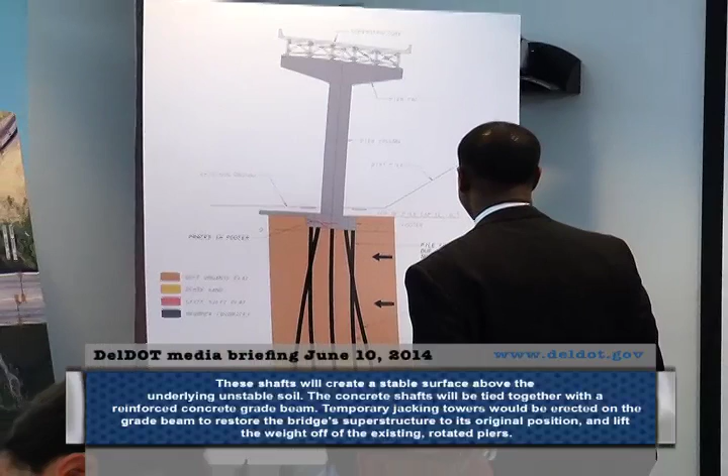When you close an interstate, it's a big deal. From our analysis of our engineers' reports, we decided we could do it safely without causing traffic chaos. So we got the crash trucks and the cones, and within a few hours we were able to close the bridge, and we did it safely, which we were grateful to accomplish.

As soon as that bridge was closed, our thoughts immediately turned to how do we get this bridge back open? So we were very focused on getting the right team of experts in the room from across the country who could tell us what was going on and how we were going to get open again.

On Tuesday, Harry was at the bridge on Monday night from Aecom, and on Tuesday I walked into a room with folks from Aecom, who's here today representing that firm. Aecom is a multinational firm with thousands of employees, so there are a lot of folks at Aecom not here today because they're busy working on the solution.

We had folks from the Federal Highway Administration, not just our local folks, but also a geotechnical expert who had worked on a similar issue in Wisconsin a few weeks ago, because we knew there was a subsoil issue that had to be addressed.

We had civil engineers from the University of Delaware. We had actually asked a gentleman considered to be an expert on this matter in terms of bridges to come down. So we literally had all of the experts together in the room to determine how we're going to get this back open.

At the end of the day, my chief engineer called me and said, we don't want to get too far down this road with the design and then have the contractor come in a couple of weeks and say, you've designed something that I can't build.

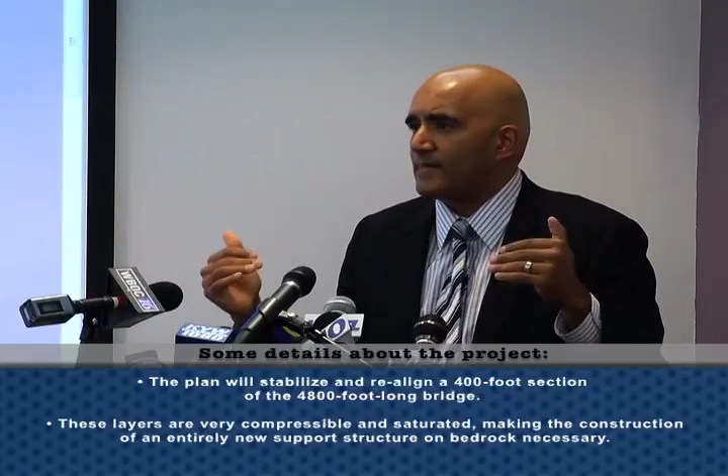The other option, and this is still something on the table, there is a small chance that we will have to completely tear down this 400-foot section of the bridge and rebuild a new section. If that is the case, we will be looking at later this year or early next year before you would see traffic there. That is something we are trying to avoid, and that's why they're trying to engineer literally on the fly, bringing the builder in at the same time so we can avoid that.

So what we've come up with is sort of a hybrid solution of putting the bridge on a firm foundation and then jacking up the existing structure in order to open the southbound lanes first, because there is less damage on that side, and the northbound lanes potentially a month later.

We will know more about a specific date in a few weeks once this drilling has commenced and we understand what is going on up to 140 feet below the surface. But the bottom line is that right now we are looking at around a Labor Day target for opening the southbound lanes, with the northbound lanes to open two weeks to a month later.

As I said, in a couple of weeks we'll be able to firm that up. Could it get better? It could. But could it get worse? It could. So we don't want to set unreasonable expectations at this time.

With that, just as a brief update on activities around the site, a lot of people have commented on the fact that there have been 24/7 operations going on down there since we started, and I want to commend some of the Delaware contractors who have been helping us remove that dirt. 50,000 tons of dirt was removed as of yesterday, and that's where, again, we pointed out that the bridge has begun to rebound slightly, which gives us reassurance about getting that dirt out of there.

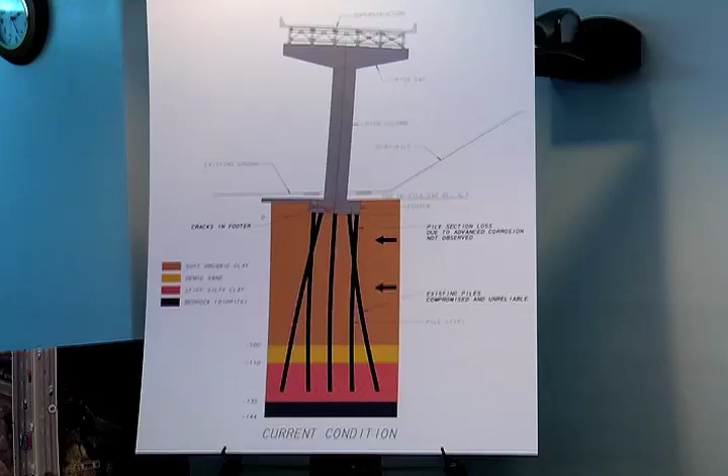From Pier 10 left or south, and from Pier 15 to the north or right here, Delaware has inspected the bridge, and we have no signs of distress in any of the other areas. So what we'll be talking about primarily is this zone from Pier 11 to 14, where we have evidence of distress.

This view is somewhat exaggerated, but it shows the conditions to allow everyone to understand what we're facing. The bridge has leaned. This is only one of two hammerheads, there's a paired structure here.

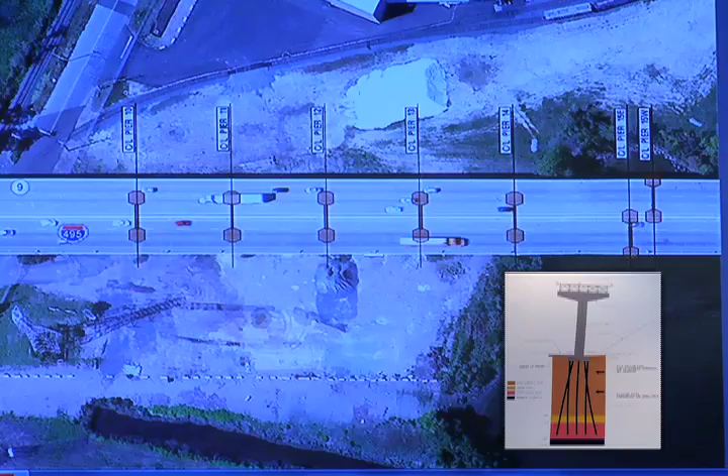What you're seeing is a lean-over produced, we believe, from a lateral force pushing against the original bridge foundation, which consists of steel piles tied together near the surface by a concrete foundation or footer. As you can see, with the leaning of the pier, there is a distortion in these piles. The piles go through soil at the top that is largely fill.

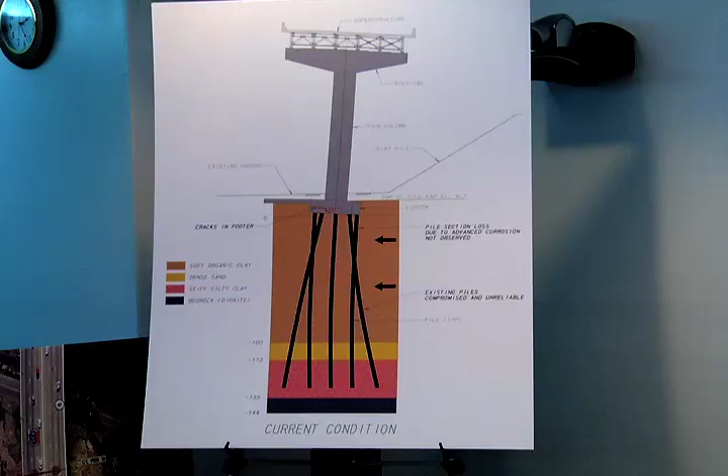Largely fill of a mixed composition. Then we have a layer of extremely poor organic clay that is probably just compacted, long-accumulated mud from when the river used to run here. And then down into stiffer material, sand and a stiff clay, and bedrock.

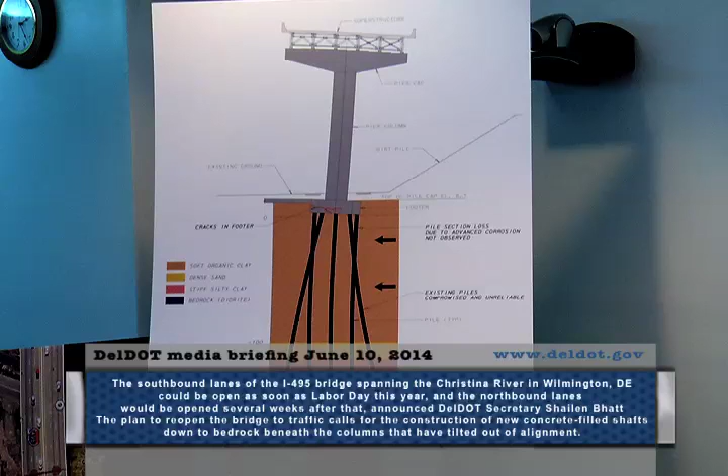The piles originally went down into that stiffer material and were embedded in this loose, very poor material that can be easily consolidated and compressed - that's the organic clay. The distress we've seen includes some distress at the foundation level, and the piles are bent.

Basically, the conditions we're seeing tell us that everything in the ground is no longer reliable, can no longer be counted on for the long-term solution or for what we're using now when we want to go jacking. A concern about jacking through this compressible material is that if we tried to land at grade level, it would load the piles that are already compromised or potentially compromised and unreliable, and the support provided by this soil is not good.

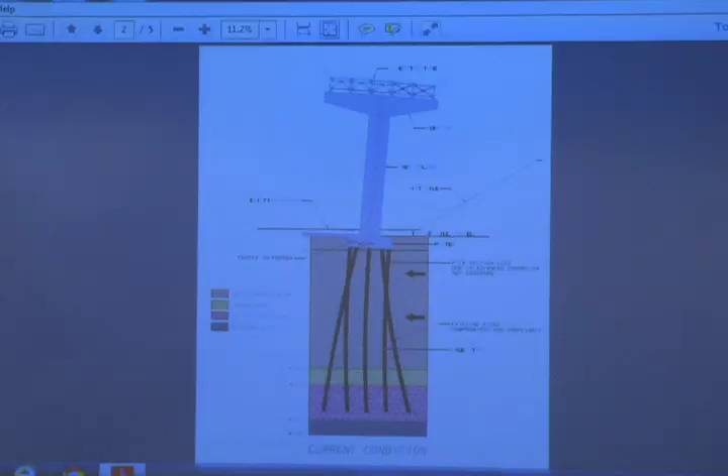It's very springy. We would anticipate a great deal of variation, and it's just not very stiff. The solution is to sink new foundations deep to bedrock. We've designed around the materials that are available.

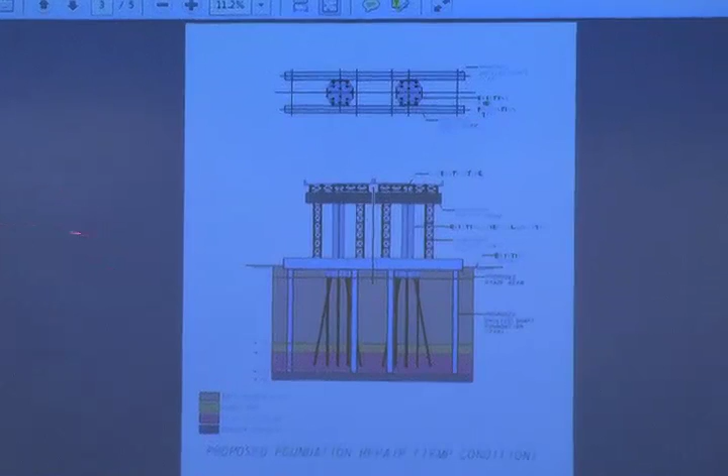What's being designed, and is underway now - procuring materials and equipment - is a 4-foot diameter concrete shaft. It'll be reinforced concrete within a steel casing. The casing helps to sink the hole from grade level approximately 100 to 140, maybe 150 feet deep to the bedrock. Basically, there will be 4 shafts here, here, here, here per hammerhead, or per single shaft, so 8 per pier.

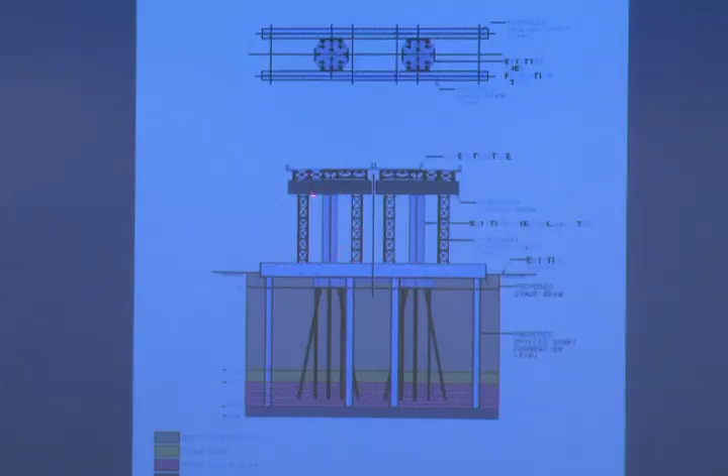These shafts will be tied together with what we're calling a grade beam, a concrete beam that will be constructed once the shafts are in place. The concept, and I may ask Greg to elaborate on this, will be jacking towers off that grade beam to get support up to the superstructure, the girders and the roadway.

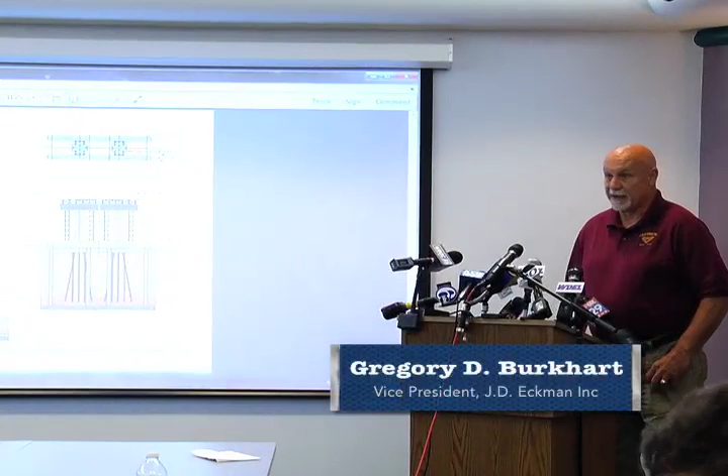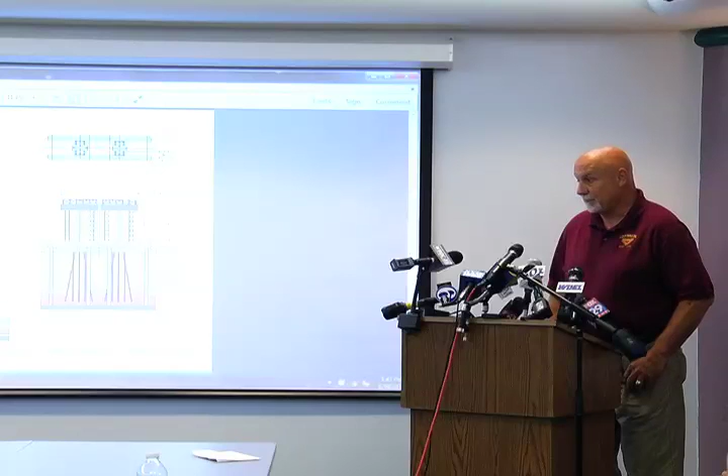We've worked on several different bridges in Delaware. We've done I-95 through Wilmington, the Wilmington Viaduct. We've done emergency jobs for DelDOT - the Brandywine, I-95 over the Brandywine, had a crack a few years back and we were called in to fix that. At 10th Street, a truck ran into it, and we were called in to shut I-95 down for a weekend and restore traffic by Monday.

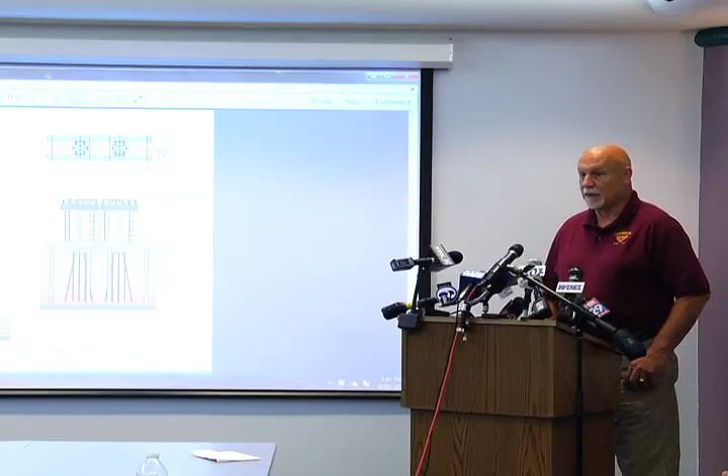We've also done several jobs throughout Pennsylvania. Most recently, the Harrisburg truck fire over top of 81 - we restored that traffic back in 4 days. We also did Richmond Avenue, I-95 in Philadelphia, where there was a cracked column. We were called in by PennDOT to jack the bridge up and fix it there.

So we have extensive experience with this kind of work. We have 8 licensed professional engineers on staff - this is all we do. That's their job: jacking plans, erection plans, and demolition plans. We have the people in-house, so it gives us a bit of an advantage to get answers very quickly.

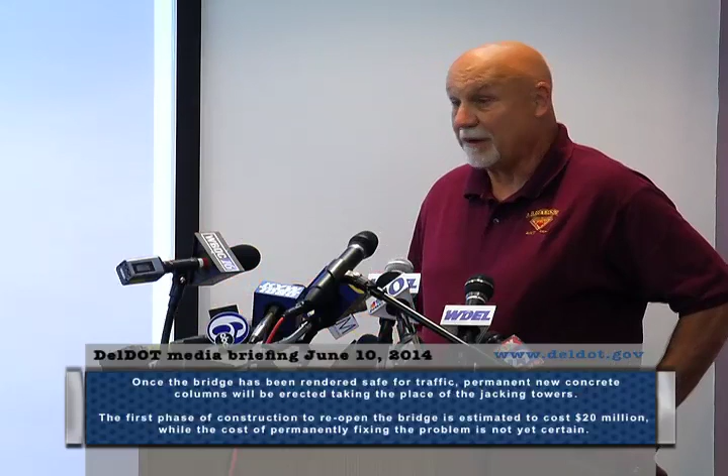But that's my background. We've certainly done every aspect of this job. It hasn't been a specific job exactly like this, and I don't think there ever will be, but every part of this job we've done, as far as drilling the caissons down to bedrock, installing the caissons, the grade beams, the jacking. We do hundreds of bridges a year, or at least we've done hundreds of bridges for jacking. So the concept is to put that grade beam in, put jacking towers on top of the grade beams.

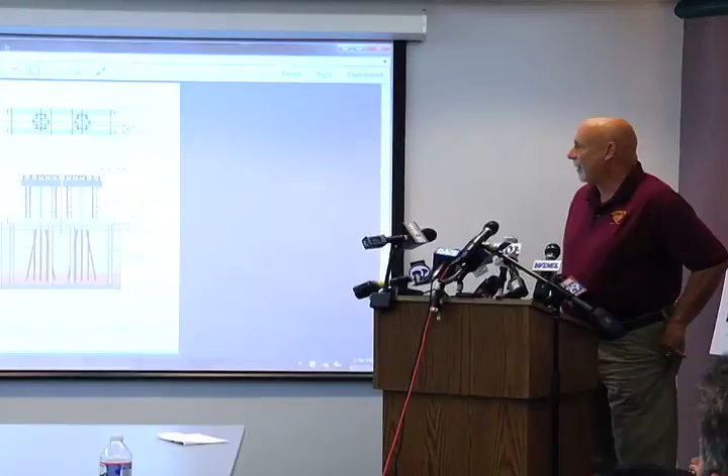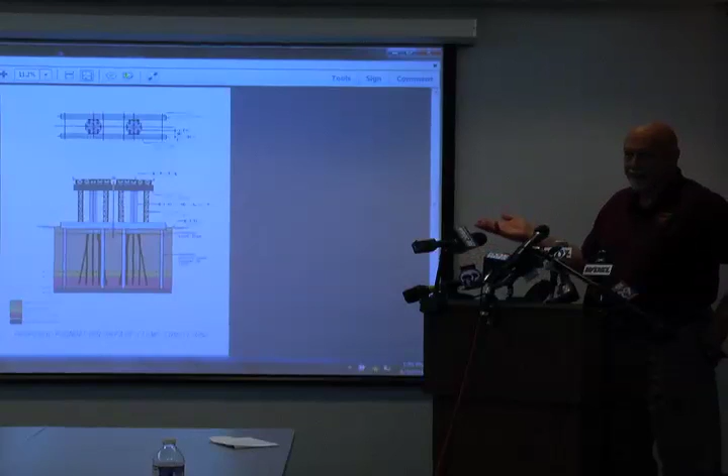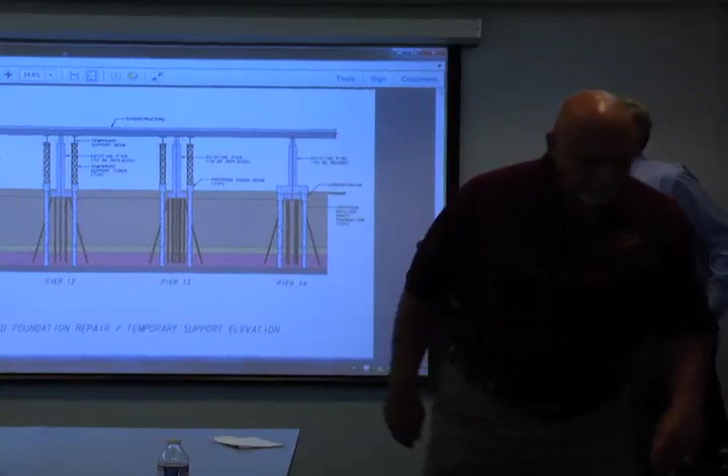Then put a header beam across the towers, and we'll put on jacks, hydraulic jacks, typically 100-ton jacks. If we need more than 100 tons, we nest them together or use bigger jacks. In any particular northbound or southbound, there are 6 girders, I believe, and 4 piers. There will be 24 jack locations, and we'll be jacking everything simultaneously. We'll have feedback from every jack to tell us where it is in relationship to the other jacks, so we can get this back up to the proper height and alignment.

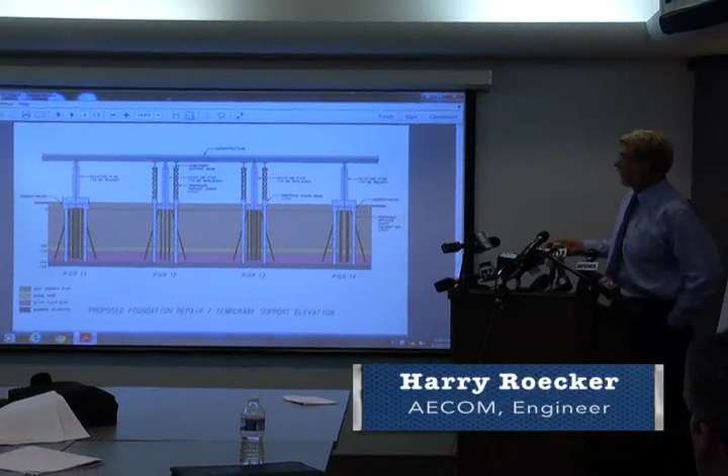Okay. Oh yes, you can take this. Yeah, okay. And Greg points out the number of jacks.

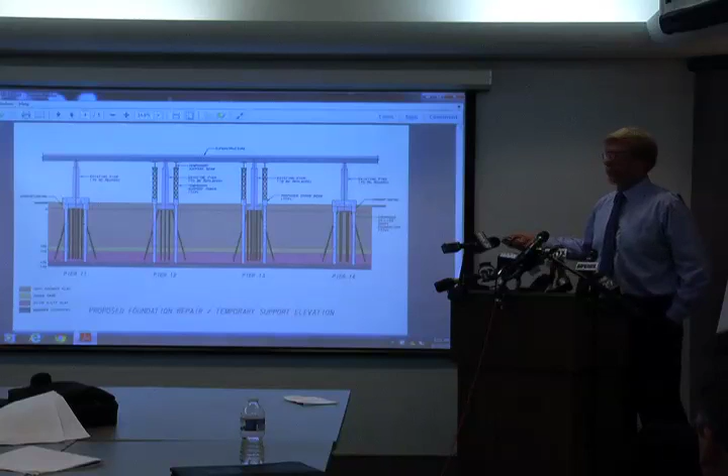One point to note: for the piers where we are planning to do work, these girders run continuously across the supports, so we have to look at it not just as one span at a time, but in fact as a continuous unit, known as a continuous girder. That's relevant to the jacking plan, and also relevant to assessing the loads and the stability of the superstructure.

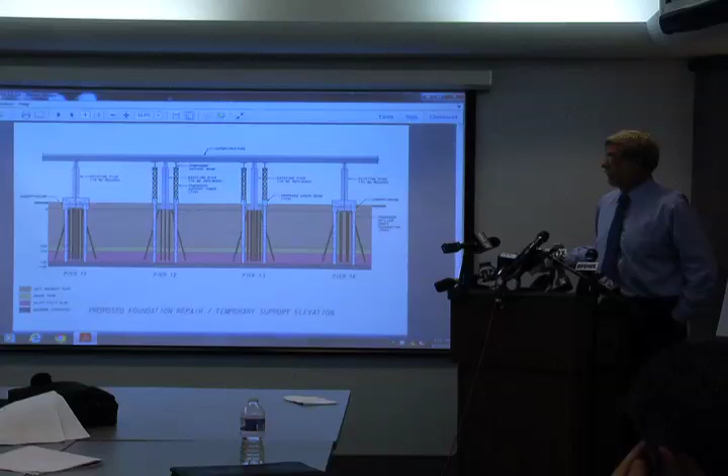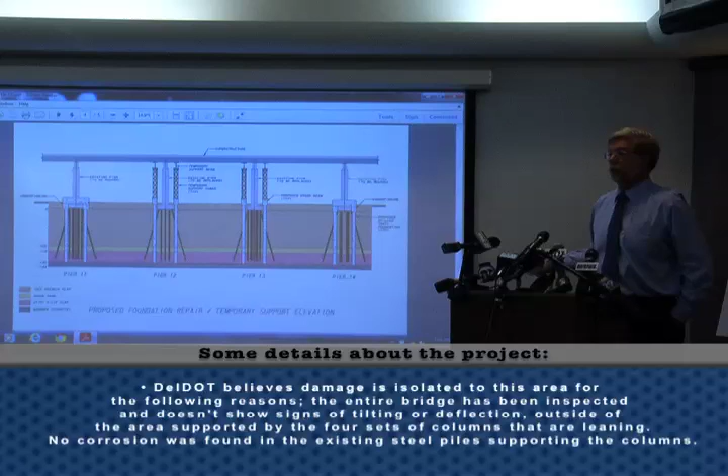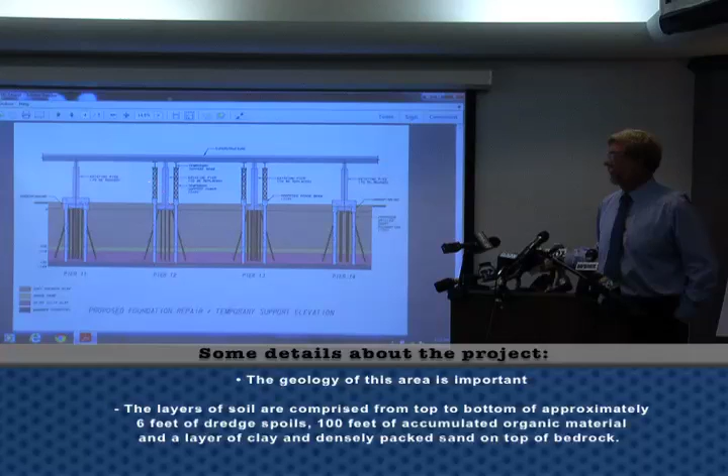What you're seeing are the 4 piers. In all cases, we are talking about going to bedrock with a new foundation, because the existing foundations are deemed unreliable. There are basically 2 types of configurations once we get that new foundation in place. On Pier 11 and Pier 14, we believe the piers themselves above ground can be reused or continue to be used, so we will essentially be underpinning those piers to our new foundation.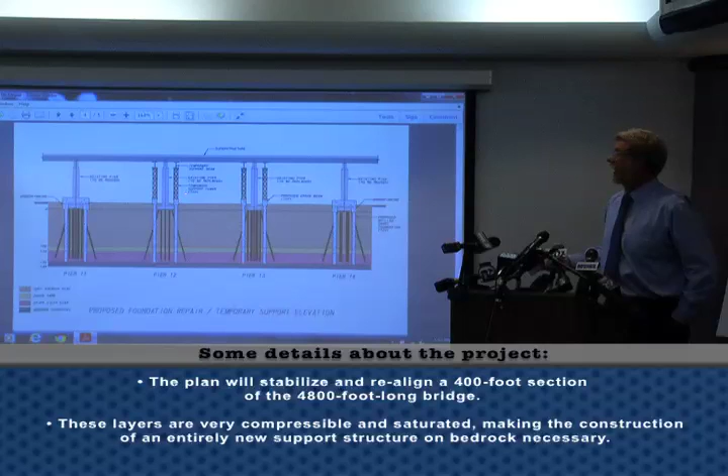In the case of Piers 12 and 13, where the leans are much more severe, we anticipate it's a better solution to get the temporary loads, or get loads and support for the superstructure, to allow traffic to resume on the temporary towers, and then to take out the existing towers and build a new substructure on new piers on our new foundations.

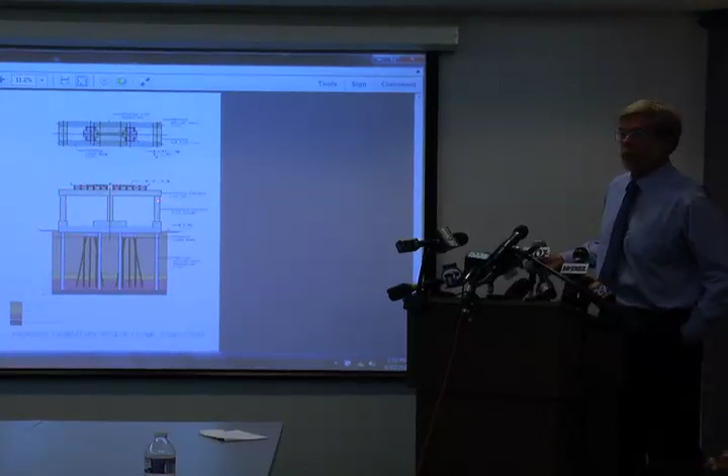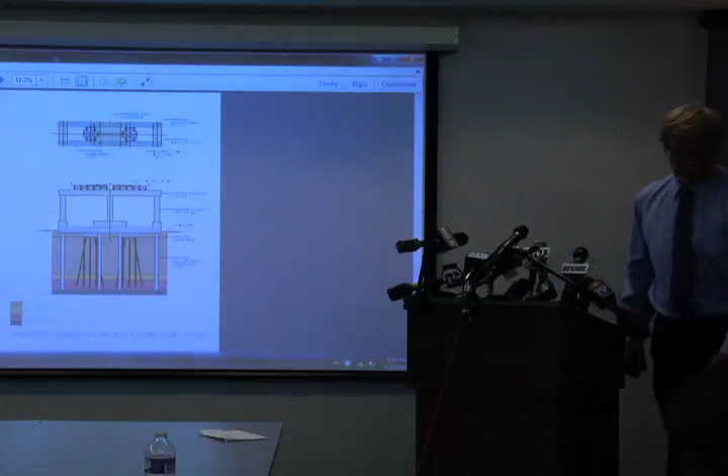The next slide shows that in the other direction. Basically, again, 4-foot shafts down to bedrock, that common beam that was used to jack, and this shows what we're proposing, which would be called a 3-column bent, a different configuration, but 3 columns supporting the existing superstructure.

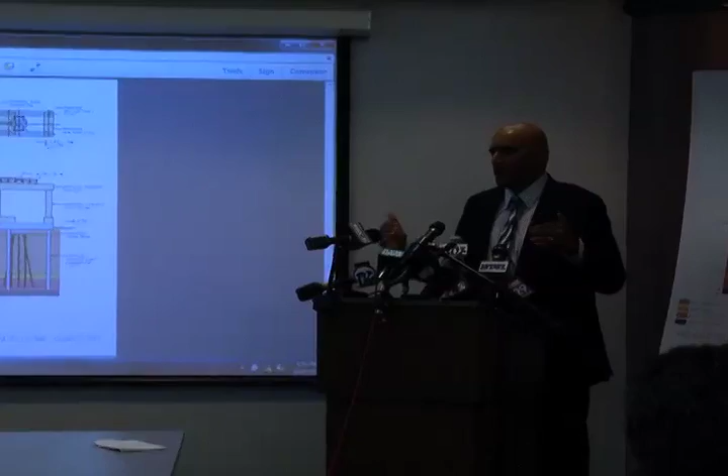Okay, thanks, Harry. So we're going to open it up for questions if anybody has them. Before we do, I just want to go over a couple of other items.

We put this out yesterday, but we have been looking at all of the traffic options in terms of ways we can optimize routes, getting the message out to people both in the area and in the region, so that if they're coming down from New York, they can stay on the Turnpike and take the Delaware Memorial Bridge across. We do have a closure on 95 northbound this week, a part-time closure between 10 p.m. and 5 a.m.

We had planned to close 95 and 202 for that construction job this weekend. In preparation for that, we had removed the asphalt, and under heavy traffic the road is unraveling a little bit, so we are going to have lane closures from 10 p.m. to 5 a.m., but they will be monitored. Our traffic folks have looked at the traffic counts at that time. We believe the counts are low enough that traffic should not back up, but we'll be monitoring it, and if it starts to back up, we'll lift the closure and flush the traffic through.

We've been getting a lot of questions about that, so we just want people to be aware that we will continue to monitor traffic conditions, provide that information on our website, and continue to provide these updates as we go along.